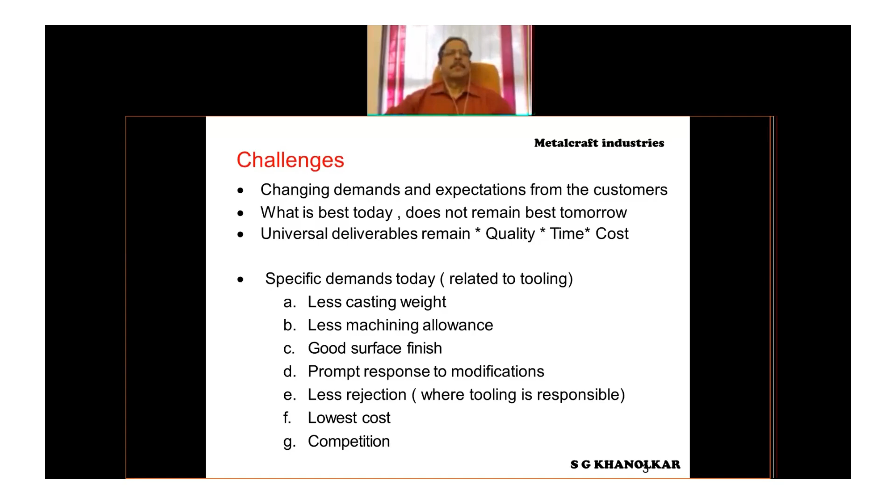Specific demands in today's context are less casting weight. Everybody wants casting weight to be minimum, and of course at no point should the casting wall be less than what is expected. Machining allowances - a lot of machining cost is a function of the machining allowance that we provide, so lesser the machining allowance, lesser the machining cost. Surface finish has to be good.

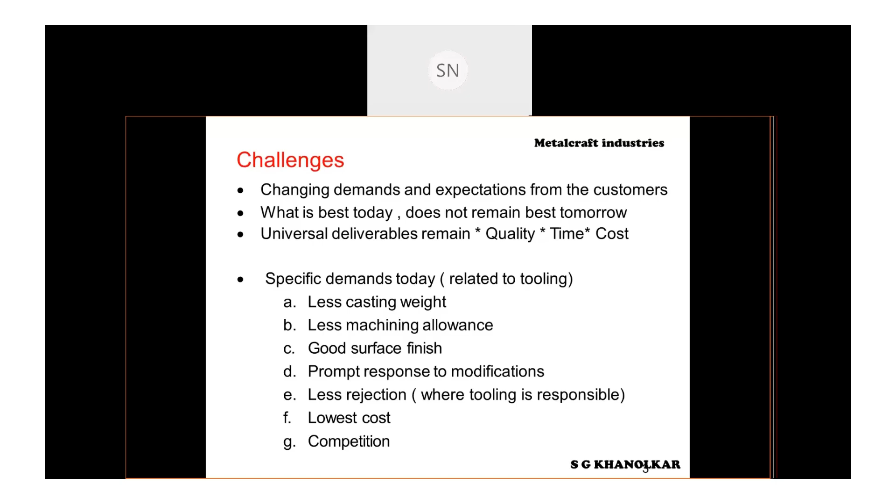Prompt response to modification - the tooling should be designed such that it is possible to modify those tools whenever modifications are expected, desired, or any changes are to be made in the tooling. Rejection, of course, should be minimum possible. This is again a debatable point, because whenever something goes wrong in a foundry, people gather around the pattern or the core box and decide to do something on that. The same pattern or core box was giving a considerable good amount of casting, and suddenly the rejection shoots up, and people start talking about what is to be changed or modified in the tooling. So I'm saying less rejection, but wherever it can be positively attributed, the reason for rejection can be directed towards the tooling. Of course, tooling should be lowest cost, and simultaneously competition has to be taken into account.

With these specific demands of today, let us move further. Now, at this point, the first point that I've said is less casting weight.

Now, casting weight, everybody wants minimum casting weight. I got a telephone call last week from a very senior person in a foundry. He asked me, what should be the tolerance on the casting weight? The drawing says 70 kg, my casting says 71 or 72 kg. Should my customer pay for it?

My explanation to him was that weight is a function of volume into density. Density is defined by your composition. Volume is defined by your drawing.

Every drawing will have some acceptance limits, generally governed by an Indian international standard ISO 8062. The castings we use for mass production or automotive applications are classified in the category CT8 to CT10. CT10 is the coarsest of the range, and CT8 is the most accurate.

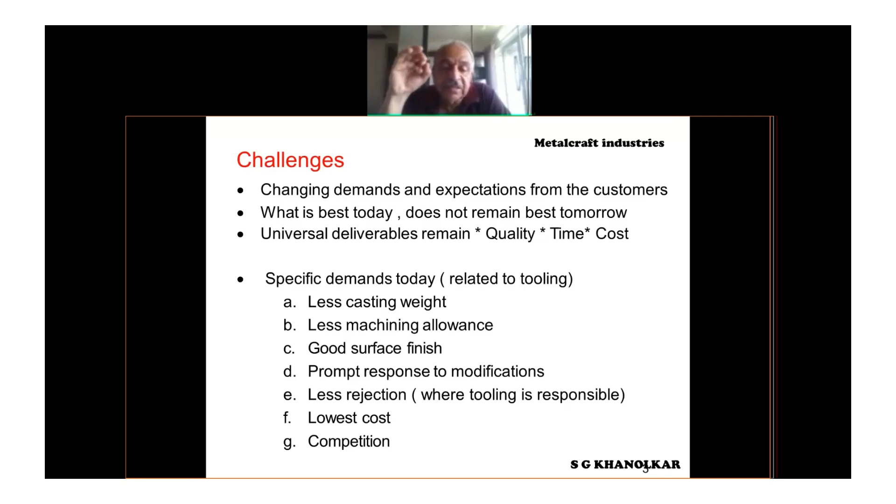We'll move to the next slide. Having understood this concept, we now start with the making of foundry tooling. The first step I consider here is scope finalization. Many times, if some pattern makers are attending this session, generally you are given the component drawing and asked to quote for the tooling cost. But what about scope?

Which molding line, what type of cores are there, on which machine the cores will be made, whether the foundry production facilities have enough capacity to produce the required number of cores. Always there will be some bottlenecks in the foundry. So if you design or develop a core box in one of the bottleneck machines

in the foundry, the entire production will be restricted by that one small bottleneck machine. So scope finalization is a very important thing, which in my opinion should involve each and every person who is going to be associated with production of that casting, from purchase department, from marketing, from methoding, from core shop, from molding line. So all should sit together and

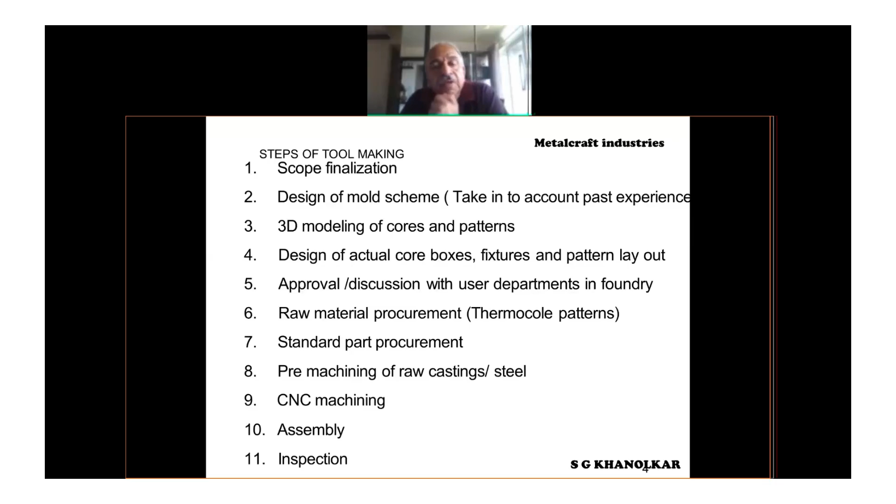Now we'll spend some more time here on scope finalization. That was the first point in mold scheme design. This is a very important activity, but it is generally not given its due importance in the beginning.

Because whenever a new order comes to a foundry, everybody is excited to deliver castings in a very fast manner so that the customer is very happy. And in that, people overlook or shortcut things like proper discussions with user departments, proper analysis of our own abilities, proper understanding of what the customer needs. This all takes a backstage, and something gets manufactured.

Some toolmaker is hired who also doesn't take that much effort. Some tool is made, casting is made, and then almost 3 to 4 times the time is spent in modifying and coming to meet the requirements of the customer.

Foundry purchase, sometimes end customer's purchaser—in this case, maybe an automotive company buyer—development department in Foundry: in many cases, the entire cross-functional team in Foundry is involved in this activity. In fact, they should be involved in this activity, not at the same time, but at different times.

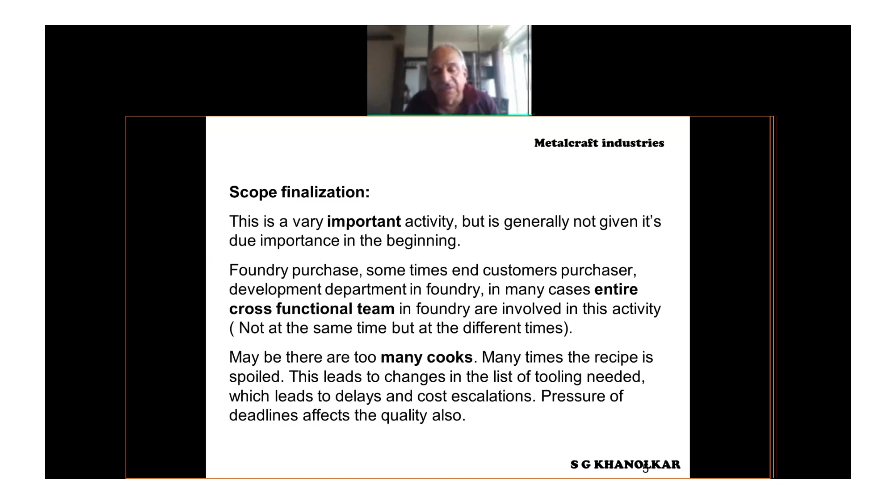So now we start with the tool designing, that is the mold scheme. The first thing is the list of tooling.

Before we make the list of tooling, I would like to mention the family doctor concept. When we were small, nobody used to go to a specialist directly. There used to be a person, maybe an MBBS doctor, a locally learned doctor. He would look at the patient and know everything in and out about him - his habits, his family background. Without asking for so many tests, he could give the medicine. Now that kind of thing is missing today because everyone thinks he needs a specialist, since there are so many specialists available.

So, list of tooling: correct definition of tool, and tool material, are the two basic things which need to be understood and taken into account in a manner where we have asked everybody, we have consulted everybody, and the list is not going to change hereafter. Correct definition of tool material is also important.

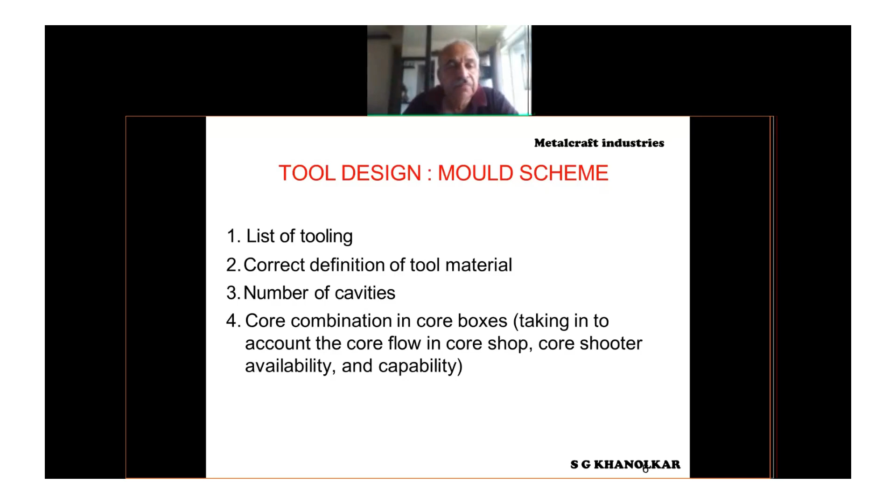Now, when you start making the mold scheme, you just read through the notes on the drawing, and there will be certain dimensions which need special casting tolerances and special gauging to achieve them. Unless this is considered while we make the entire tooling design and methoding, take the case of the Maruti 800 cylinder block.

This is a 3-cylinder block, but all 3 cylinders are made from one single crankcase core. So variations from the first bearing wall, second bearing wall, third bearing wall, and last bearing wall are minimum because they all come from one unit. Whereas if you have 3 different cores, each core will have some variation in thickness and in core making, and so on, and that will definitely reflect on your web wall thickness.

So whether machining is required, what kind of draft is allowed - all these factors will be important if the product design needs certain machining or no machining in specific areas. This means reviewing special casting tolerances and special gauging needed to achieve them. This small effort in the beginning to decide the exact scope of tooling will lead to macro benefits in the overall tool life cycle, but it must involve all concerned, including the production department, right from the beginning.

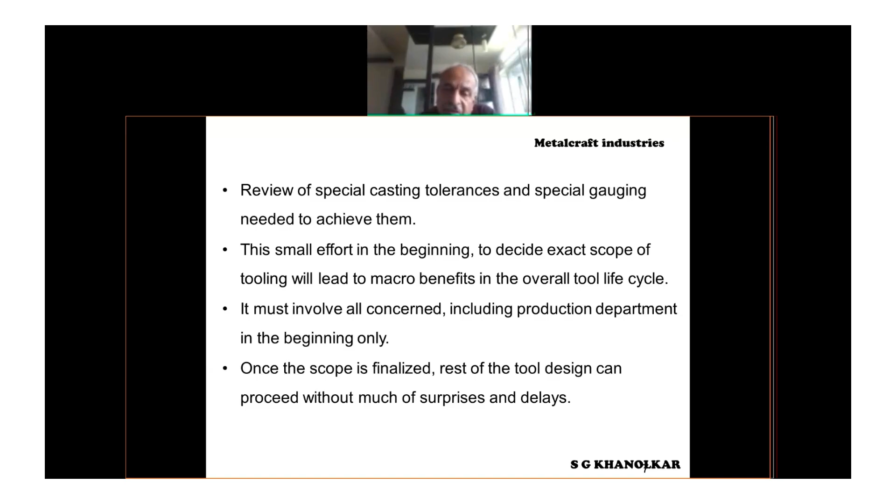A lot of energy, money, and resources are wasted, and second, the time which can never be regained. Once the scope is finalized, the rest of the tool design can proceed without much surprises and delays. This is something the toolmaker can do at his own end, but the earlier part needs collaboration from all concerned parts and departments in the foundry.

Mold scheme again is a document which outlines how a casting is processed in a foundry. It also acts as a starting point in the tooling development cycle. It is a bridge between foundry and a pattern maker.

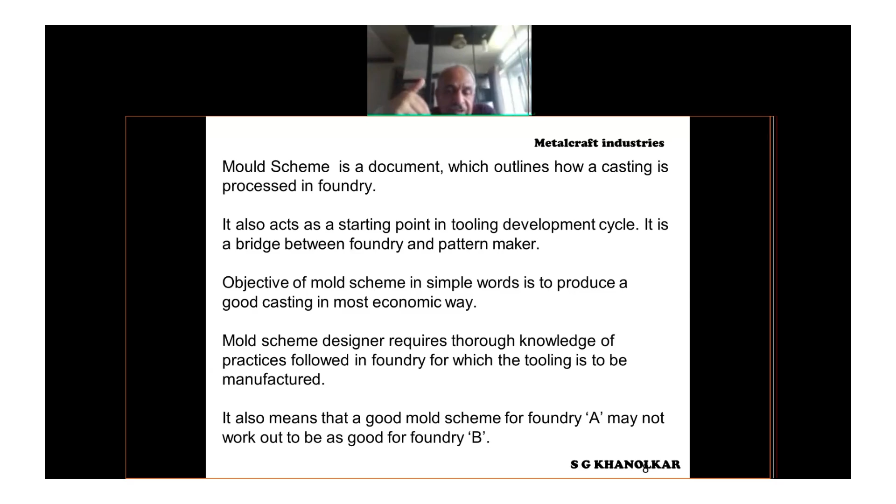With whatever experience that I have, my advice to the foundries would be: make a methoding drawing at your end, involve all your departments, all your persons, all your expertise, and make a method drawing. Give this method drawing with a proper tooling list to your pattern maker so that he will not be disturbed. There'll be no changes, no surprises once he starts his work.

So it has to be a starting point, and it is a bridge between what foundry wants and what a pattern maker can deliver. The objective of a mold scheme, in simple words, is to produce a good casting in the most economic way. Whether the core should be made hollow, or made on a vertical core shooter or horizontal core shooter, all this thinking has to go into this document.

Mold scheme designer requires thorough knowledge of practices followed in the foundry for which the tooling is to be manufactured. So there is nothing like a universal mold scheme. It also means that a good mold scheme for foundry A may not work out to be as good for foundry B.

In my experience, I've seen many times foundries are offered tooling made for some other foundry, because that foundry is not doing well, rejections are more, they have some labor troubles. Customers think that shifting that tooling from foundry A to foundry B, and if such toolings are accepted, my experience is 20% of the tooling can be utilized and 80% paraphernalia has to be regenerated to suit the foundry's requirement.

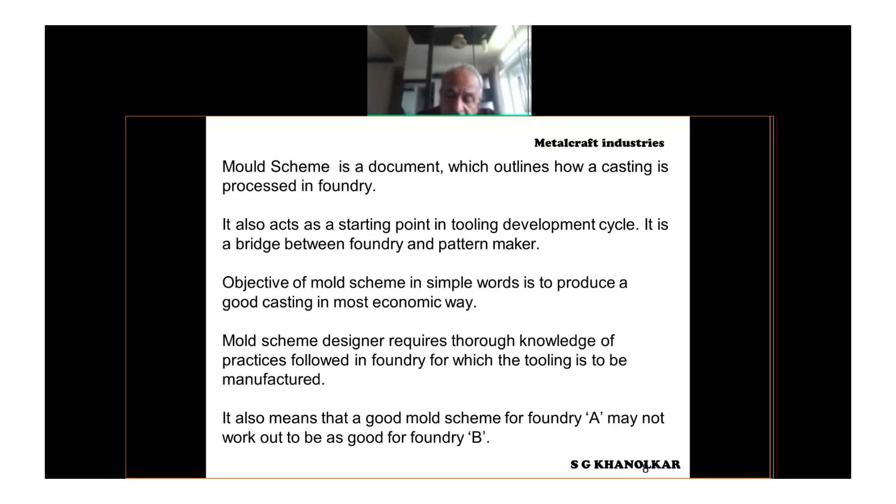If at mold scheme design stage, all areas related to casting making are properly addressed, it saves a lot of trial and error type of rework at a later stage. A mold scheme is also a form of tooling. All basic principles applicable to any good tooling apply to mold scheme, in addition to foundry specific considerations.

Most of the activities in engineering industries, such as machining or assembly, involve much less variables as compared to variables involved in a foundry. Just to list, if I'm doing machining of a part on my horizontal machining center, I have 5 or 6 or 7 variables at the most. Whether coolant is there or not, what kind of feed I'm going to use, what kind of speed I'm going to apply. These variables involved, maybe I can say the type of tool is also a variable, but they don't count beyond 10.

But if you talk about foundry, the number of variables exceeds maybe 250. The sand has got enough number of variables. The core box, core shooters have so many variables. Metal itself is a variable. Everywhere there's so many variables. So the foundry designer, the method designer has to be more experienced and expert, or at least have understanding of all these variables which can affect the quality of the casting.

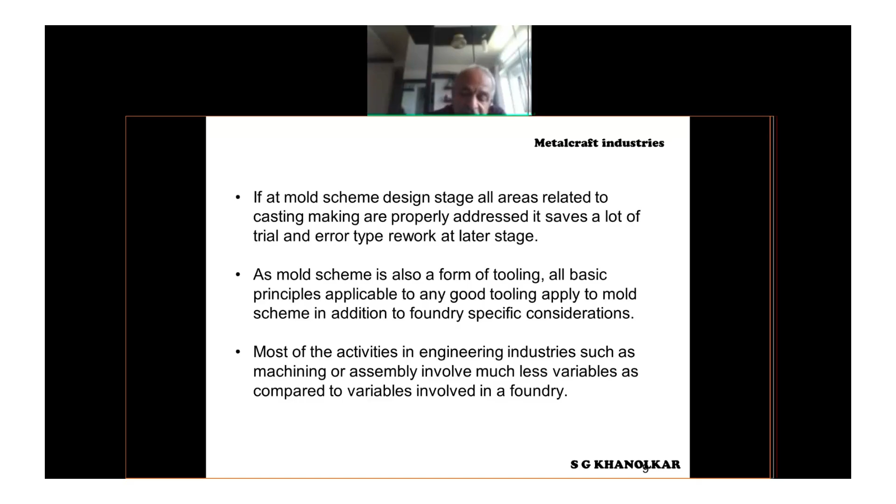After that, let us move on to considerations that should go into design of a mold scheme, which can be classified into following groups. A is the product related considerations: comparison with sample casting.

In many situations, particularly in Indian context, we have seen the casting that is actually going on the vehicle or on the product is different from what is shown on the drawing or the 3D model. Definitely there is a gap, a lapse in updation. But if you follow the component drawing or 3D model given, which is different from the actual sample casting being used,

there are surprises expected at a later date. How to avoid it? A very simple way is the moment you start, notice from your customer, ask for the sample casting. Or the sample casting has to be there when you start.

Generally, half the design of the tooling is done and the sample casting arrives. This sample casting has got so many indications which will help in deciding how to make a good casting. It will show you which part is cope up, which part is drag up, what are the wall thicknesses actually aimed on the casting and what is there on the drawing.

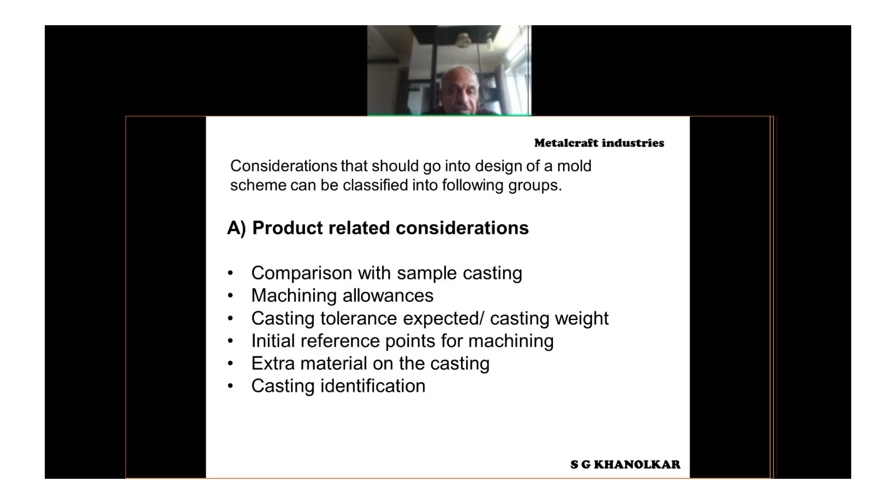Everybody wants casting identification, ISO and so many things. But 50% of the drawings I have seen don't show casting identification - at which place it is required and in which fashion it is required is not mentioned. So this needs to have clarification from all the related participants. So these are the specific considerations related to the casting.

Then there are general considerations. They are like the foundry elements which are added to the cores, the patterns like fin, the sand chord, the crush groove to avoid metal leakage outside, the contraction allowance.

Contraction allowance is, of course, volumetric contraction of the metal from the point it is solidified till the point it comes to the room temperature. But at the same time, the cores inside offer resistance to this contraction. So the contraction allowance will vary on the hardness or softness of the mold outside and the rigidity of the cores inside.

So all cored castings from inside outside will have a different contraction allowance from non-cored castings. Shell cored castings will have a different contraction allowance. This is a very important consideration because the machining allowances are directly related to this.

If the contraction allowance is very correctly established in foundry, then they can think of controlling machining allowances. But if we are not sure about what contraction my casting is going to make, or a smaller casting is going to have a different contraction as compared to the bigger ones, percentage terms I'm talking about, then machining allowance also needs to vary to that extent of the uncertainty that you have on contraction allowance.

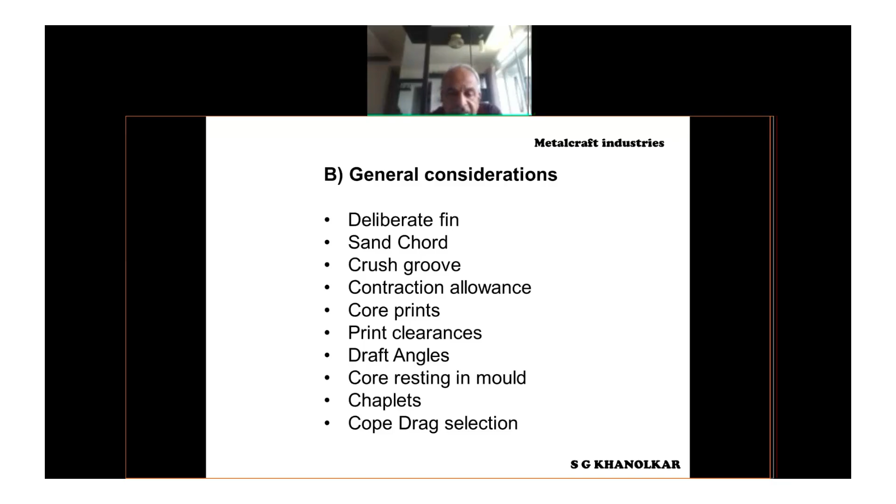earlier toolings, the practice that has been followed. Then productivity related considerations. How many castings per mold we would like to make? This is more important when people make small castings, like 42 castings per box or 30 castings per box. And because one size of the riser is changed, from 3 rows it goes to 2 rows, so 10 castings gone. So it's a very important consideration to decide number of castings per mold.

Maximum number of cores per mold. Now my molding line is running at say 60 molds per hour. I can fit say 10 cavities of patterns in one mold box. And each casting needs 5 cores. 10 into 5, 50 cores I need to place in that speed of molding line, which is 1 per minute. So this also has to be taken into account, how many cores I can place into the mold to match, to not stop my molding line for want of cores.

More than one type of casting. Generally, people say that there's still some space, can you accommodate some more casting, some other casting on this? But this is only an idea. I never practiced, or I don't think anybody's practiced this.

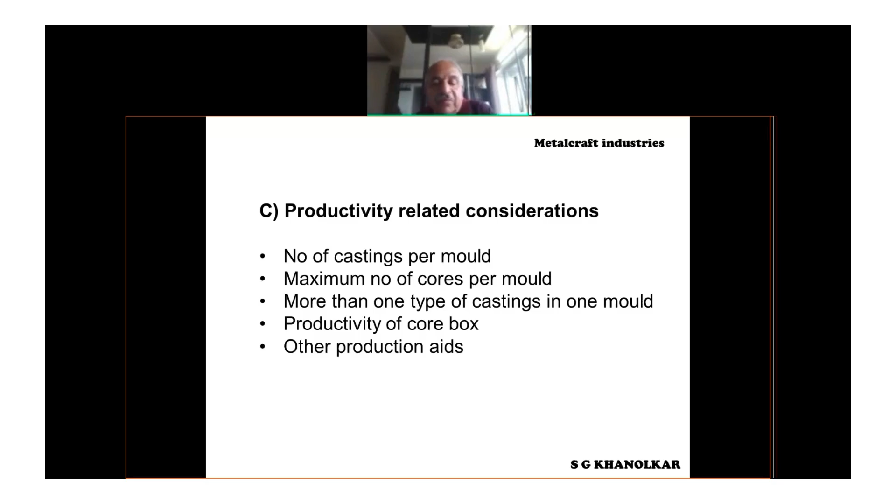Productivity of the core boxes. Too many cores in one core box reduces the productivity. So lesser number of cores accommodated in core box, maybe with higher productivity, could be a good answer, and other production aid. Then core related considerations, parting lines of cores, core resting, core location, core handling, core hollowing, core to core fouling, blow tip reliefs, special considerations for blocks and heads.

These are the considerations. Why I'm saying mold scheme is a very important document, because when we talk about core prints, we don't think of all these things. But unless a proper thought is given to all these points, whether core needs to be made hollow or not. This is a big debate that used to happen 20, 30, 40 years ago, and even today.

Now people make, because for the sake of it, people make cores hollow, particularly crankcase cores in a cylinder block. Then after some time, they find metal going inside. So metal is costlier than sand, so they decide, okay, we'll make it solid.

So another person gives an idea that let us make a plug core, make the core hollow and plug it from backside. That's an additional operation. So whether one should go at all for this or not. Again, making a core hollow or making a core solid will have some implication on the eventual contraction also. So all this has to be given a thought at the mold scheme stage.

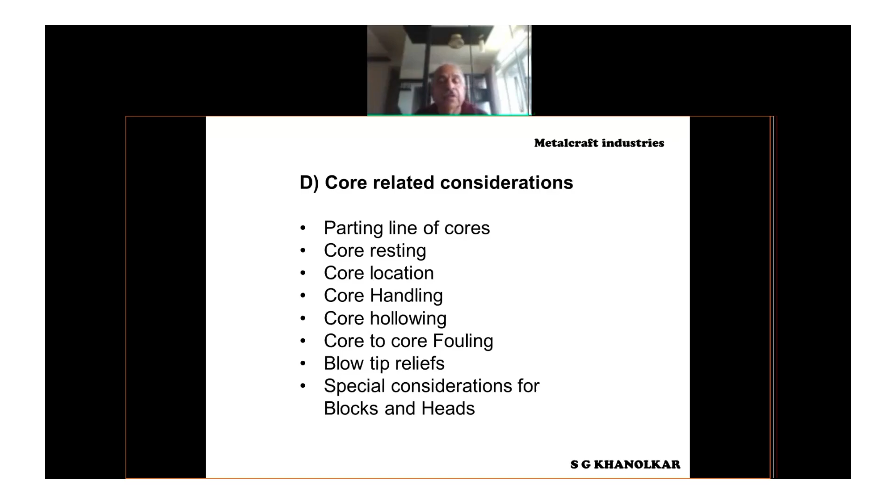Mold related considerations, draft angles, particularly in self core pockets. I am yet to see a foundry where half degree self core can confidently be made. So accept this and let us say that any self core that we are going to make will have 3-degree draft angle. Discuss with customer, get it modified, and start with the pattern making.

Location of sprue is again a mould related consideration, because you do everything and then realize that the sprue cutting machine doesn't reach that point. So all this, in today's context, since CAD/CAM is there, can be standardized. When you make a pattern layout, the sprue will always be visible and you will easily understand that you cannot place casting like this or make this kind of layout, because the sprue cannot be taken to that place.

Parting line leakage, what is the minimum sand wall? Then fettling related considerations.

Fettling related considerations - generally, whenever we used to ask for sample castings, we used to ask for unfettled sample casting. That gives you fantastic information about how the casting is made in the earlier foundry, the sample foundry.

Parting line selection - horizontal, vertical fin, the fin parallel to the wall of the casting or perpendicular to the wall of the casting - depends on the process for fettling that you're going to employ. Fettling templates and gauges, gating and venting system, good drafting practices, initial reference points on the casting - these are the fettling related considerations.

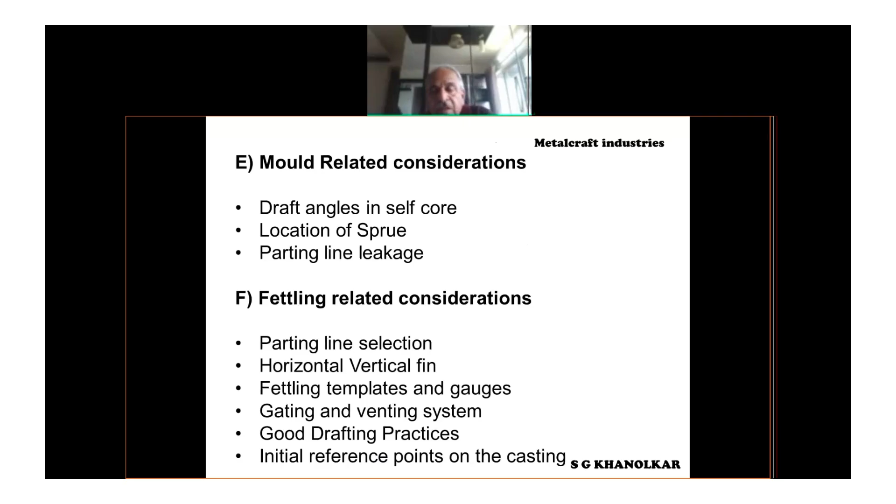After having talked so much on this, there are some people who are not exactly aware of foundry tooling or their benefit. This is a typical representation of a cylinder head methoding. The magenta color is base core, then these are the port cores, then the water jackets.

Today with 4-valve cylinder heads, it has become almost impossible to make a single water jacket, so you have to make a split water jacket. Place the bottom water jacket first, then place the port cores, then the top water jacket, test it, paint it, and so on.

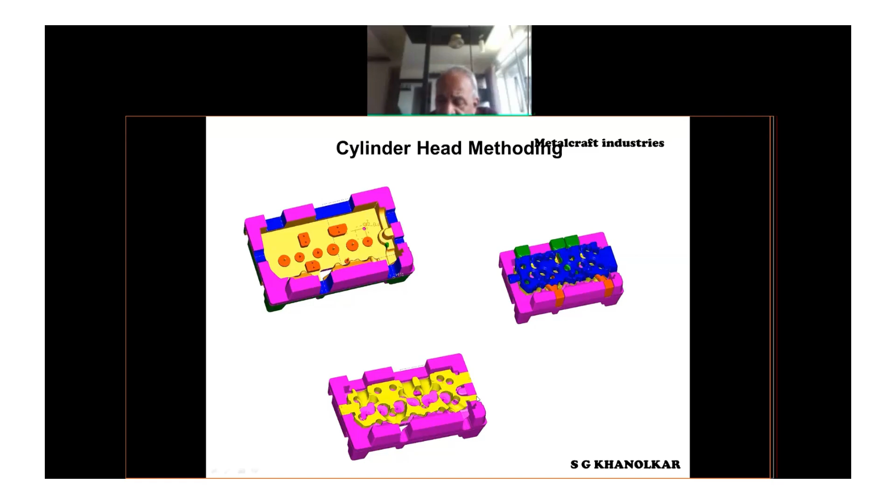This is typically how it will be gated. This is the filter seat.

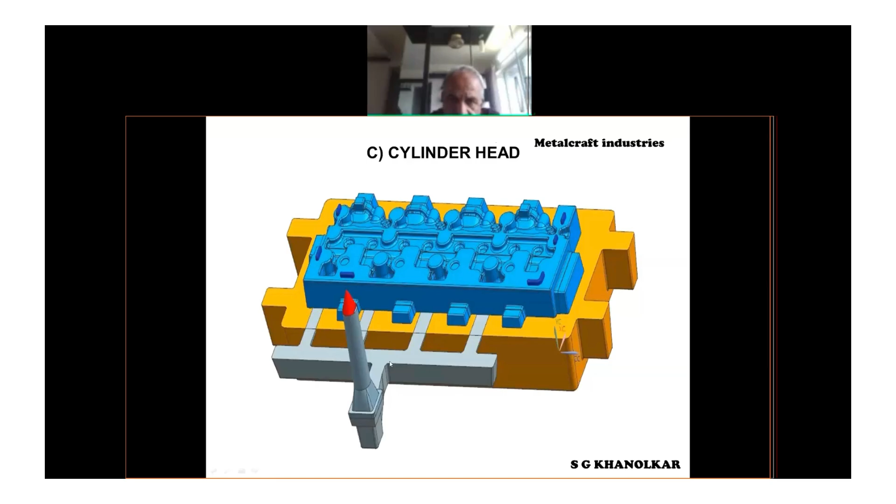Now come to this. We started with understanding the customer's requirement, involving all the departments in the foundry. Then developed, defined, and perfected a document called the mold scheme, where all the thought and experience have been pulled together, and a document has been approved.

Then it's easier to extract cores from that, and then decide on which process the cores will be made, whether it is shell or cold. Again, shell will have two options, vertically parted or horizontally parted. Cold also will have two options, vertically parted or horizontal.

So once we decide that this core has to be made by the shell process, on a vertically parted core shooter, the first thing that has to be decided is core parting. Then comes the door half, or ram half, or fixed half, or moving half selection, because most of the machines will have an ejection or core extraction system on one side of the machine.

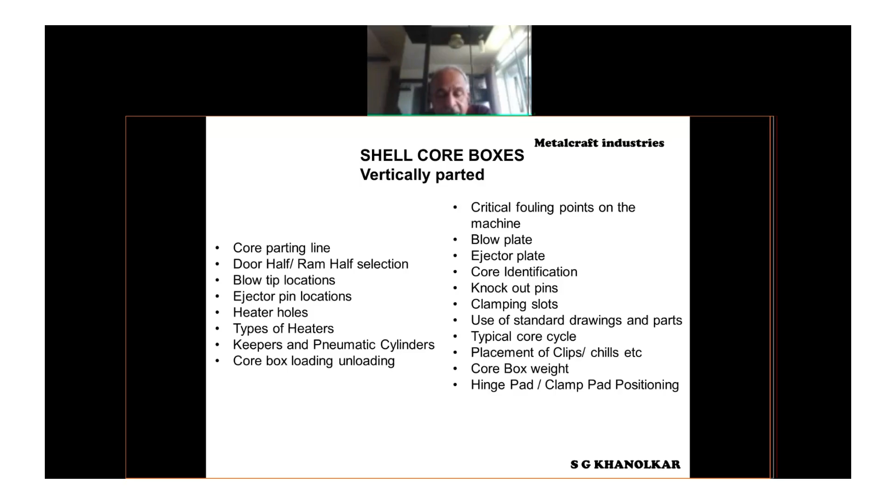A lot of rework can be saved if the designer understands what he is going to design. Placement of clips, chills, etc. Many times the methoding needs some metallic parts inside the core. So whether that can be placed into the core, whether under flow or pressure of air it doesn't get disturbed, damaged, dislocated - thought has to be given to that.

Weight of the core box - many machines have got some weight limitations, and on the other side, we want a big core produced using the same machine. So core box weight is again a very important consideration. Pad clamp, that is joining of the two halves and safely loading it onto the machine.

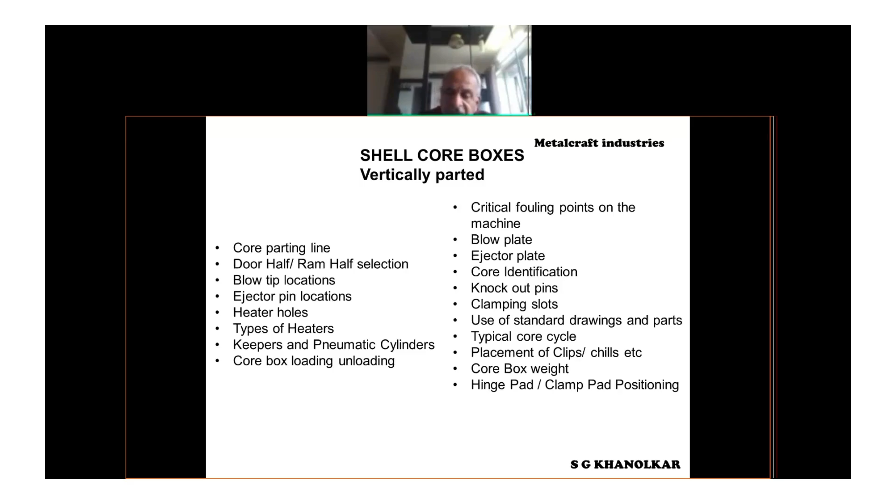This is a very simple core box required and used for a core shooter where the heater plate is heated. You can see also additional holes, but the ejector plate that is used is that of the machine. This is, I would say, the simplest shell core box.

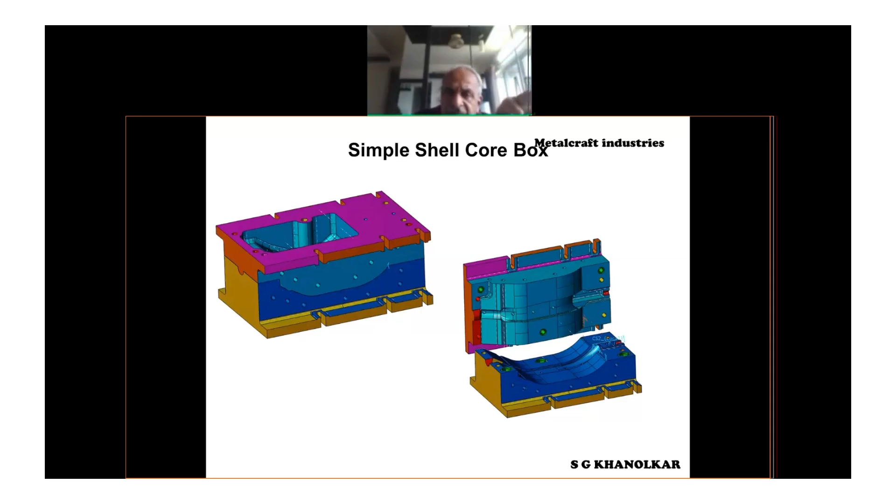Then this is a slightly advanced version where heaters are there. The ejection system is there. The ejection plate has to be guided. Then there has to be a bolster.

Then come to horizontally parted shell core shooter - top bottom selection, selection of blow locations. Now, generally a debate is made whether horizontally parted core shooters are good or vertically parted. I would say each has got its own advantages and disadvantages. But cores which are very difficult to make can be made relatively easily on a horizontally parted shell core shooter, because the area that is available for providing blow tips is much more as compared to vertically parted core shooters.

Second point is the sand has to travel a lesser distance on a horizontal core shooter. And sand also, in case of cold box, it is gas also. So cycle times are generally faster on horizontally parted machines than on vertical ones. So top bottom selection depends on the extraction mechanism that is available on the machine, selection of blow locations, selection of bottom ejector pins, core unloader positioning, the extraction mechanism, guiding mechanism for blow plate and ejector plate, floating arrangement in bottom.

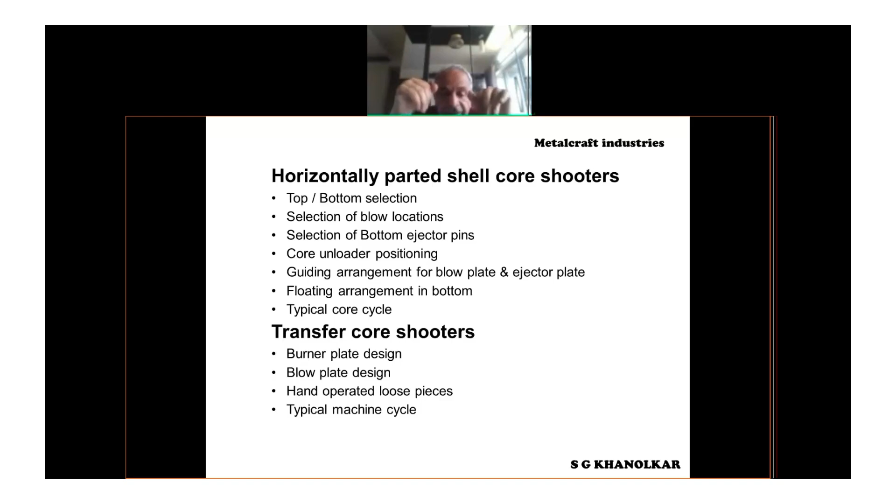Because heat is involved, it's a shell - so if the top expands and the bottom doesn't expand to the same extent because of the temperature difference, and the bolster on which the core box inserts are mounted is at a much lower temperature, then if no provision is made to allow this expansion, warpage is going to set in. The moment the core box is warped, the core dimensions are going to get affected.

Transfer core shooters nowadays are not in use, but it needs a burner plate, blow plate, or a separate kind of design. Hand operated loose pieces - whether they are allowed, whether they can be used in a foundry - again needs discussion and approval.

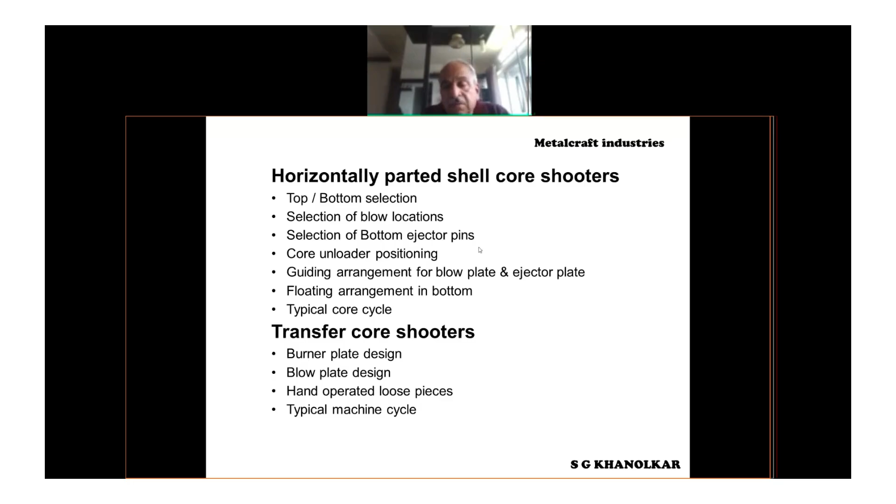Cold box, again, it is almost similar. The considerations are the same. Maximizing output is the consideration.

Core box combinations are also important because suppose a foundry has 20 core shooters, they would have no problem allotting 4 or 5 core shooters to make one particular casting. But if they have say 5 core shooters, they cannot use all 5 for producing one particular casting. So the core box combination, which cores can be made in one particular core box, will depend on the availability of core shooters, positioning of the cavities, bigger cavities in the center or delicate cavities in the center, or whatever.

Blow tip size and positioning - details we'll discuss some other time because we've already spent more than an hour. Blow plate, gassing plate - I'm just listing the elements involved.

Same as shell, the difference is we are dealing with amine gas here. So leakage of amine gas has to be prevented, and the whole circuit is supposed to be gas proof or leak proof.

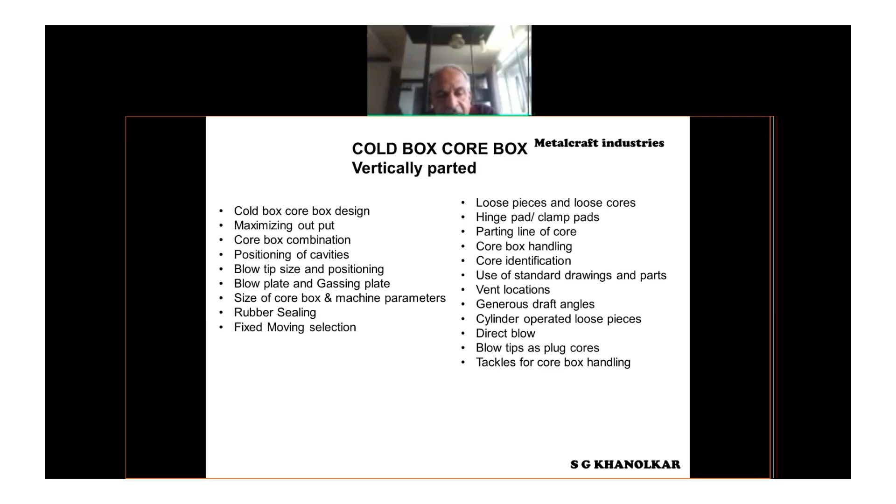This is a typical vertically parted core box: bolster, core box insert, ejector plate, guiding arrangement.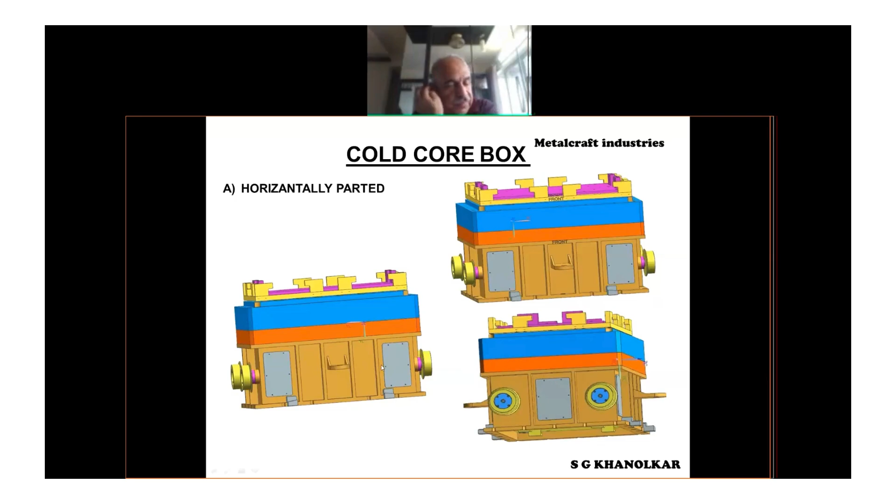Today, with higher and higher numbers required from any foundry, modern core shooters are employed by most Indian foundries. They need very elaborate foundry toolings, the cost of which can be almost 3 to 4 times that of conventional tooling, but their productivity and output are also much higher, and dimensional accuracies are much better.

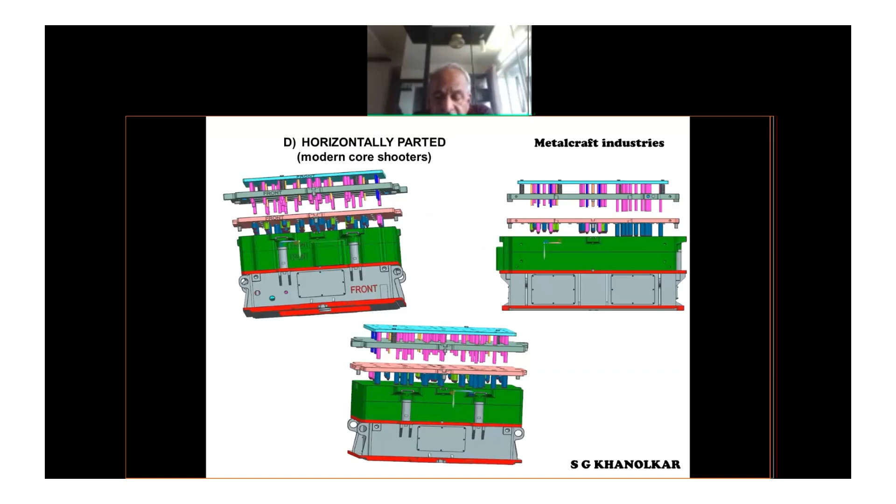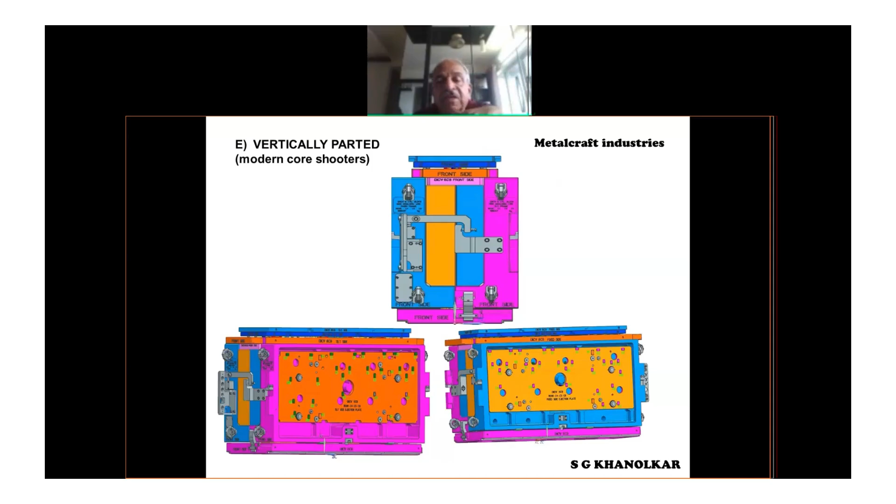And more than cost, if a design goes wrong, or the selection, or there is a major modification at a later date, you can imagine the cost involved in this.

This is vertically parted again, cold box core shooter, different angles. Use of templates, I talked about this initially.

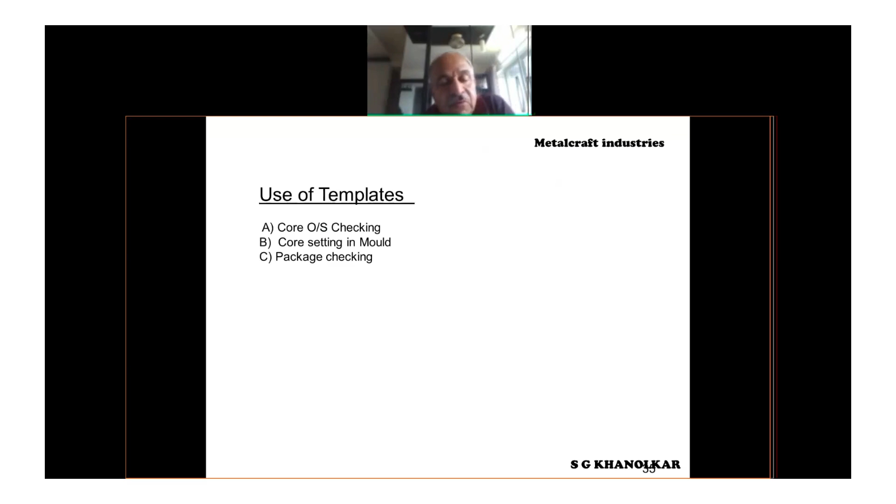The thinking has to go into it. Now let's come to the final core setting fixture. Design the bottom half with 3-2-1 location of cores, so each core has to be properly located.

Gravity is going to settle the core into place, provided there are 3 proper restings, 2 restings against to define the second axis, and 1 for the third axis, or any other kind of location. But the core has to be arrested at all degrees of freedom.

Locator positions - locators should not come in the casting area and all that. Position of cavities and pattern layout has got a direct relationship with fixture layouts.

Core placing sequence, whether trolleys are required, use of core trolleys, pneumatic cylinders, foolproofing, orientation of the casting, maximum number of cores in FCSF - I spoke about this a little while ago.

If there are 20 cores, manually somebody has to keep those 20 cores into the fixture bottom half. If it takes longer time than what the line can provide, maybe core packaging, making a core package beforehand, or having 2 bottom assembly fixtures can be thought of.

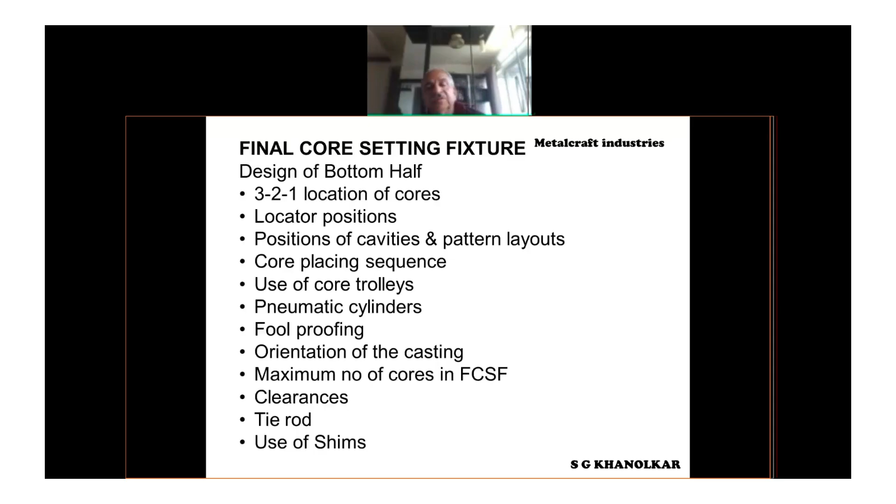Clearances, tie rod, use of shims. Design of top half - the bottom half we have talked about, so the top half, which sits on the bottom half and takes the core, clamps the core, picks up the core, and lowers it into the mold.

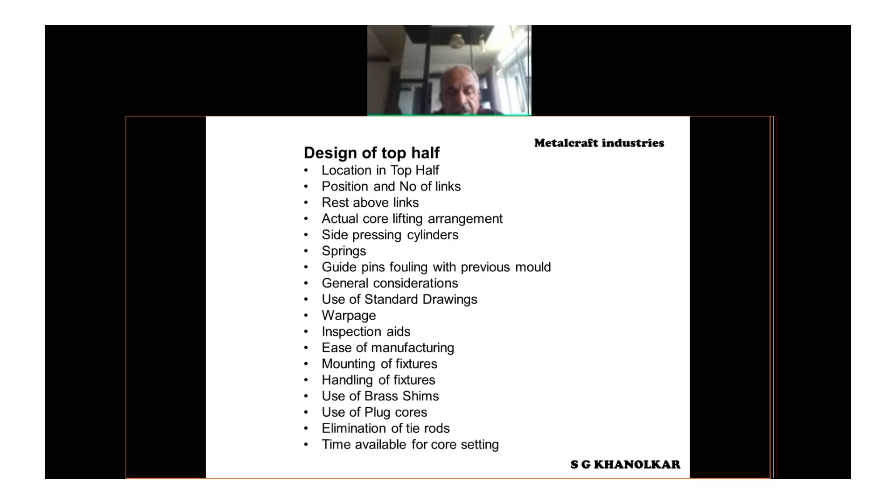Then we are coming to the end. Let us talk about casting averaging fixtures.

The first question is why casting averaging is required. In the Indian context, we have 60-year-old, even 100-year-old designs still running for manufacturing today, alongside modern castings also being machined. The way foundries have evolved, machining processes have evolved too.

Earlier, I have seen in one northern Indian tractor manufacturer, each casting when taken on the machine was marked with a reference line. That reference line was again taken into the machine setup, located, and machining started from there. So each casting was viewed separately.

Then came the concept of averaging fixtures, because the foundry made the casting and said it was okay, but when it went to the machine shop, sometimes there was fouling reported, no machining reported, or excess machining reported.

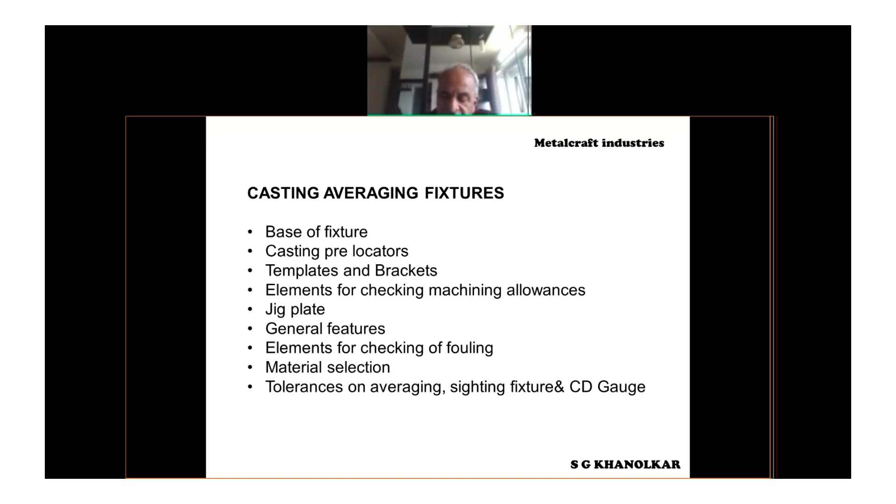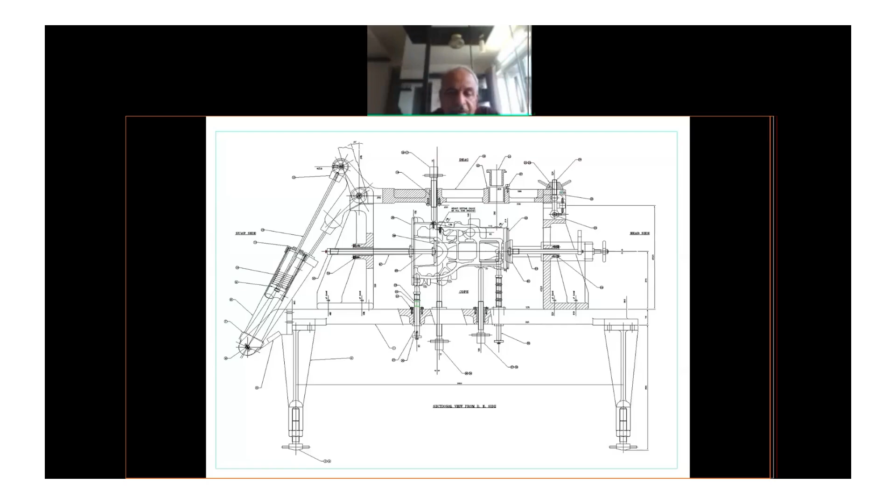These templates ensure all proper profiles of the casting match the reference, and then you generate 2 or 3 spot facings and 2 dowels before it goes for machining. This is a 50 to 60-year-old machining practice still followed today in many companies.

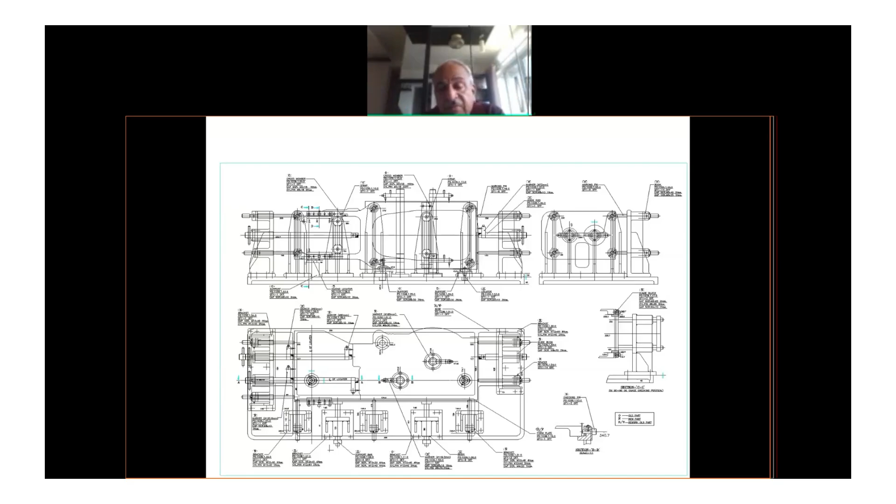But with advanced casting manufacturing and machining processes, many customers, particularly Europeans, have shifted to 3-2-1 location. We make the casting and ensure it is proper with reference to defined reference parameters, and the customer machines the same casting using predefined machining references. With this, the averaging operation has now been eliminated in maybe 30 to 40% of cases.

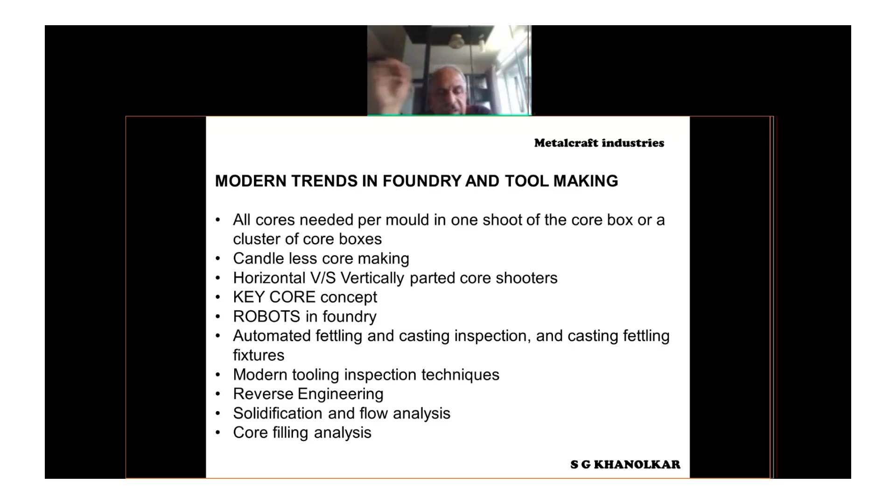Now, what are the modern trends in foundry and tool making? With robots coming, more automated machines, and huge machines like 8-ton ones, all cores needed per mold come in one shot of the core box or a cluster of core boxes. So you change the entire cluster and the whole setup changes — there's nothing like making core storage and bringing trolleys from different locations to assemble them. It goes as a continuous process.

Candleless core making is again a new concept, though now it's stabilized. Horizontally versus vertically parted core shooters, we discussed. Key core concept, robots in foundries — one has to visit foundries to see this. Automated fettling, casting inspection and fettling fixtures, modern tooling inspection techniques, reverse engineering, solidification and flow analysis, core filling analysis.

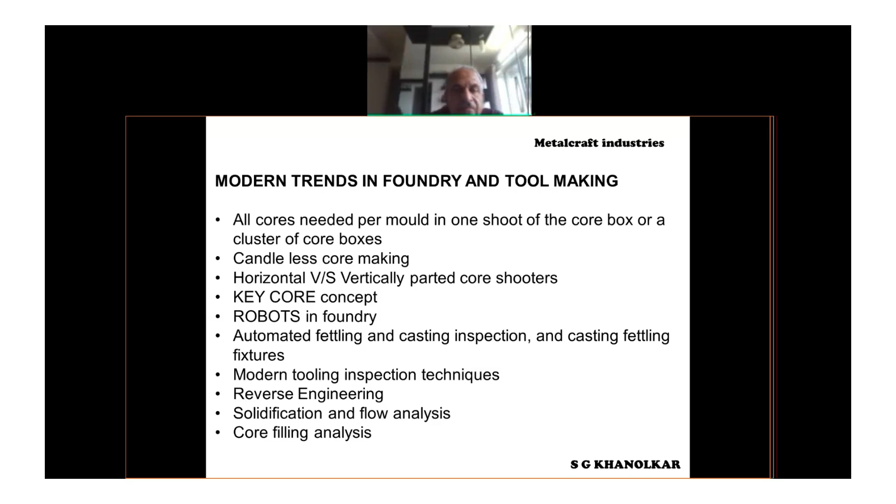Now come to materials for foundry tooling. As I said, when making foundry tooling 40 years ago, wood and aluminum were easier to hand machine, so they were used to make masters or references, then converted into actual tooling — cast iron tooling, SG tooling, or steel castings. The next materials are EN8 or OHNS, then P20 pre-hardened and H13.

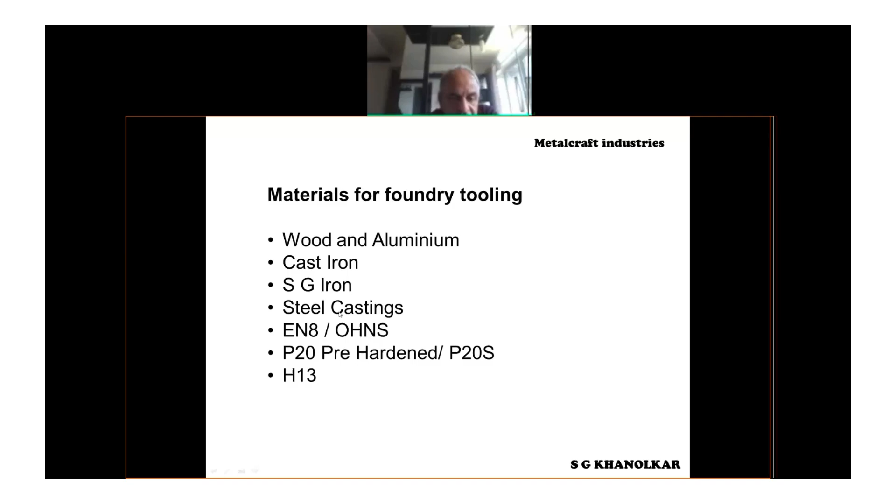Each material has a cost attached to it. H13 after machining will need heat treatment. P20 comes pre-hardened around 30 to 32 HRC. The rest are not hardened, so we get whatever the casting hardness is.

Tolerances on tooling — what is desired? Meet all the machine constraints and parameters: parting line gaps, finish, shape.

With CNC machining, people expect that since CNC is there, they'll easily get plus minus 5 microns or whatever. This is a misconception, because if you machine a pattern, you need a tool almost 300 millimeters long. Such a long tool will have some deflection, some run out, some wear, and some variation in tool form. Because of this, the final machined part will differ from the desired part.

So I'm not saying that all the inaccuracies are going to come because of this, but one has to take care of these problems, or counter them by innovative means, to finally achieve plus minus 100 microns of dimensional tolerance on the tool.

Now, tooling inspection reports. Earlier, we used to have height gauge and templates to ensure that the shapes are proper. The same technology was used to make tools for Mercedes cars as is used today. People in those days may have taken many more efforts, but they were also delivering results comparable to what is being delivered today. So it's not that height gauge cannot give you correct dimensional answers.

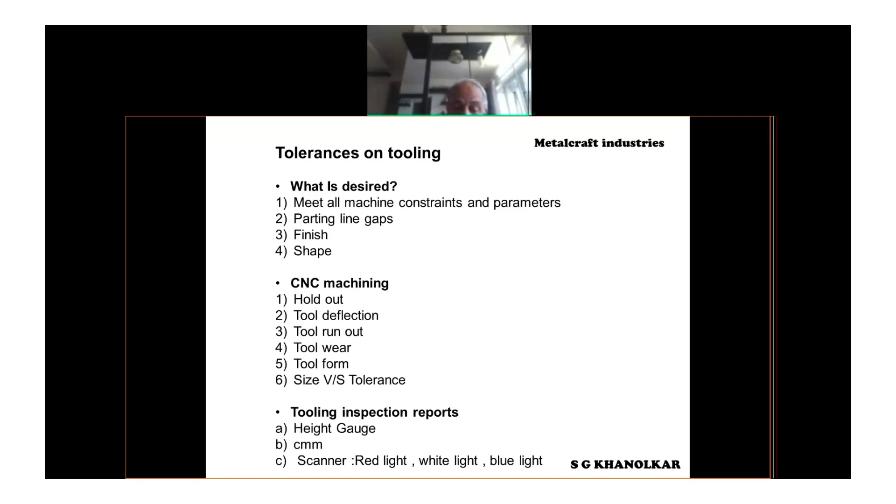People feel that red light is inferior to white light, and blue light is superior to white light, but these are all textbook observations. In reality, when we make a pattern, my tolerance requirement where sand grain is 200 microns, I'm happy with 100 or 150 microns. I have worked with General Motors USA also, and their tolerances are in that range - plus 150 microns, minus 100 microns. So whether it is red light, white light, or blue light, it gives you the same answer, same result. But people put in their documents that blue light inspection is required, which is a misconception.

Tooling cost optimization - we talked about so many things about tooling. Material selection has to be proper so that the tooling cost doesn't shoot up. Selection of foundry, appropriate technology, size of tooling, rigidity of the tooling, life of the tooling. If the life desired is 100,000 or 200,000 castings, the tool has to be very rigid, and the material has to preferably be P20 pre-hardened.

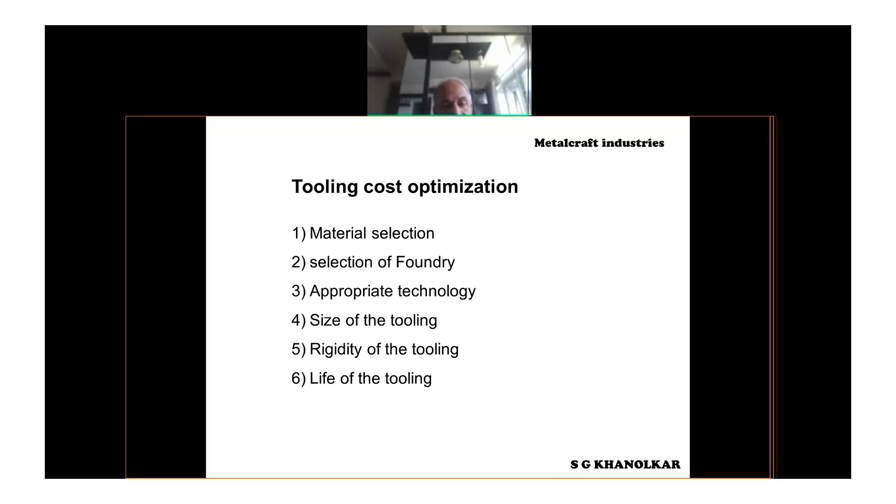Now we are coming to the end - life and care for the tooling. Good design, methoding has to be good taking into account the points we discussed, core boxes, gating, and customer changes and modifications - how easily we address these changes reflects on life and care for the tooling.

My advice would be: never ever do changes by welding on the pattern or with MSeal on the pattern. Put a pocket, put an insert, remachine it. It's very easy with CNC machines, and you can achieve the same dimensional consistency and tolerance.

Handling of the tooling has to be given proper thought, because the tooling is very heavy and mishandling can hamper the dimensional accuracies. Cleaning has to be very accessible and properly done. If there is resin buildup on a tool of say 1,000 microns - 1 millimeter - there's no point in achieving 100 microns on the dimensional tolerances.

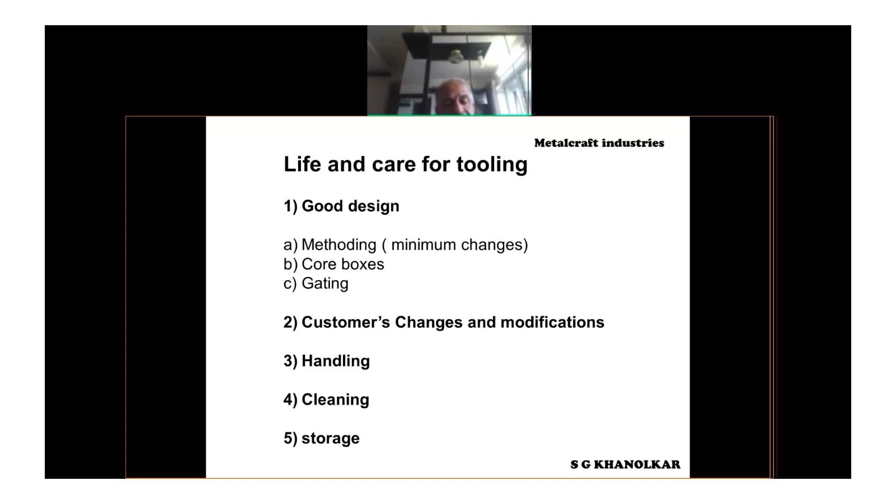Then storage - foundries end up with huge amounts of tooling storage. So identification, retrieval, storage, and keeping track of modifications is a huge task. But first one has to understand the task so that he can address it.

Some tips: upkeep and reconditioning - no MSeal, no temporary corrections, put inserts, preferably screwed from the backside so that even screw heads are not exposed to sand, no welding on tooling, monitor wear. This was particularly true in case of epoxy toolings, where you can have a color strip embedded into the tooling, so that when that strip wears off, maybe at 200 microns, you know it's time to replace the tool.

Reference dowels are very important. They should be part of tooling, part of drawing, part of culture, so that whenever you find something wrong on the casting or get feedback, you check the tool with respect to reference dowels. I have seen in a General Motors foundry producing 3,000 tons a day, at the end of every production, the core box goes to the CMM shop where there's a battery of CMM machines, and the machine automatically locates the reference dowels, checks the control points of the tool, and accepts or rejects it.

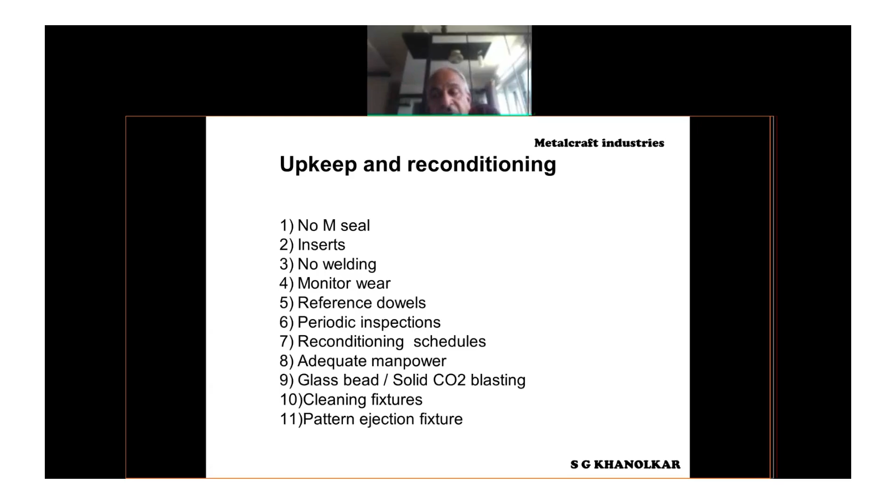Thank you, sir, for giving details of all the concepts related to foundry tooling - the details about patterns, parts of tooling, the steps involved in tool design and manufacturing, and the maintenance and upkeep also.